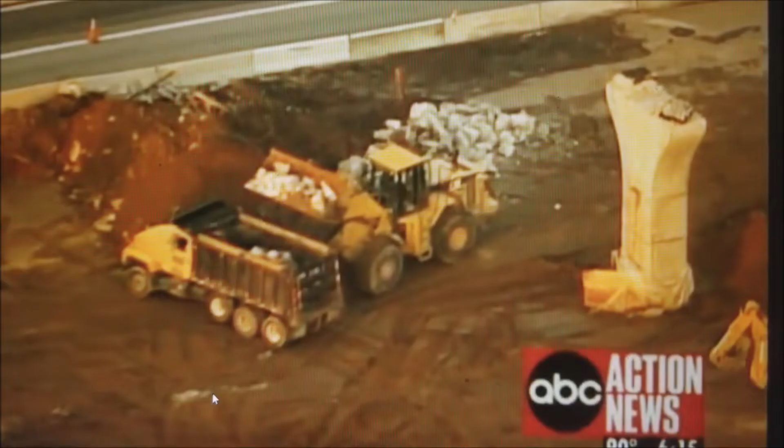In 2004, there was a pretty interesting project going on in Tampa. Cruising through Channelside Boulevard and dipping through the port of Tampa and down through Ybor City on its way out

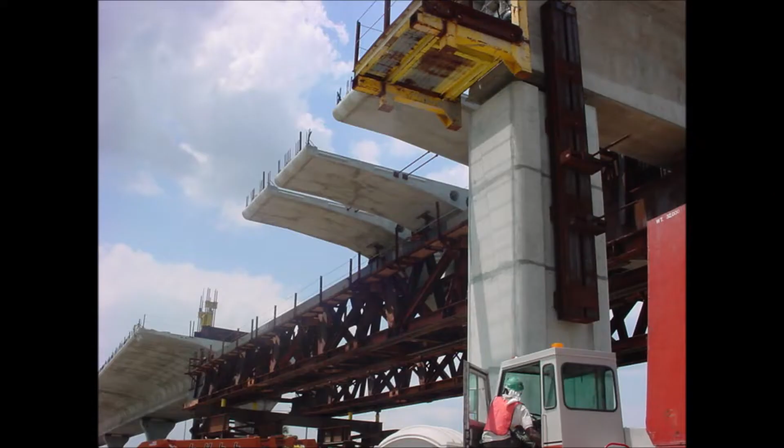to Brandon was a 9-mile reversible highway called the Lee Roy Selmon Crosstown Expressway. It started out as a lesson in the efficiency of the underslung gantry system. And there's not many things in construction as fun as standing on the giant column setting big old straddle bents.

But somewhere along the line it turned into a lesson in just how high the chain of command will go, and just how many dominoes will fall when people start cutting corners.

Governor Jeb Bush is weighing in on problems with the Crosstown. Anybody want to know how to get reporters to start asking the governor of the state and brother of the sitting president questions about the personnel on your job site?

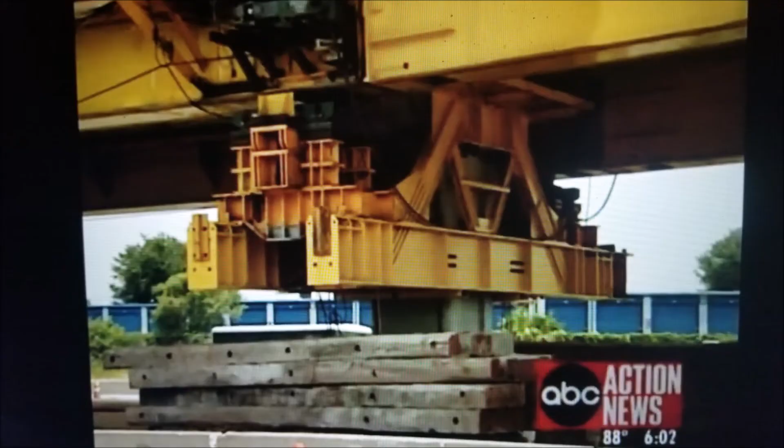If a road has got that much overrun and those kind of flaws, then it calls into question the management. And let's just say that there's an act of God on the job site. Better hope it's the good kind, like getting sunshine every single pour day.

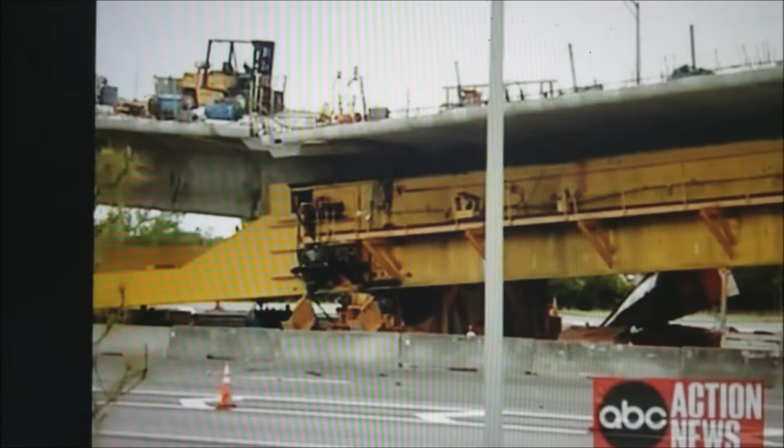Blame the collapse of Pier 97 on a mysterious sinkhole. An act of God, they claimed, impossible to predict. I don't know what to call it. I don't like to call it an act of God.

Well, I can tell you that if anything like that happened with our forces and we were aware of it, we would dismiss employees like that, because that's certainly, if that's the case, that's not something we would tolerate.

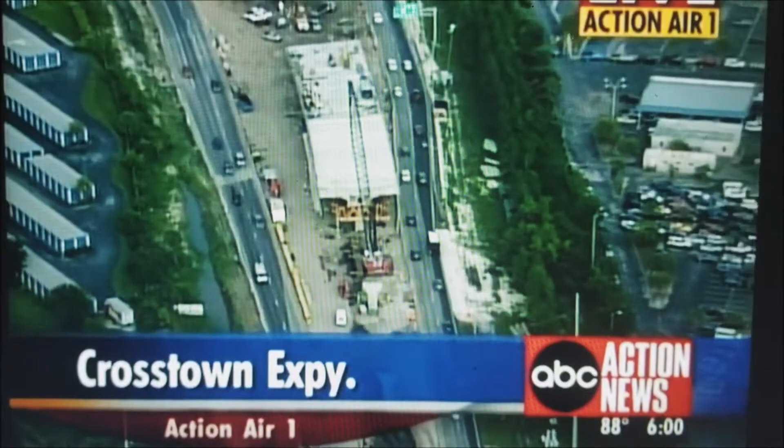How about this one? The whistleblower protection blur, where everybody knows exactly who that guy is. Was sinking. You blew the whistle on it. Yeah, I guess they just wanted to keep it hush-hush for as long as they can.

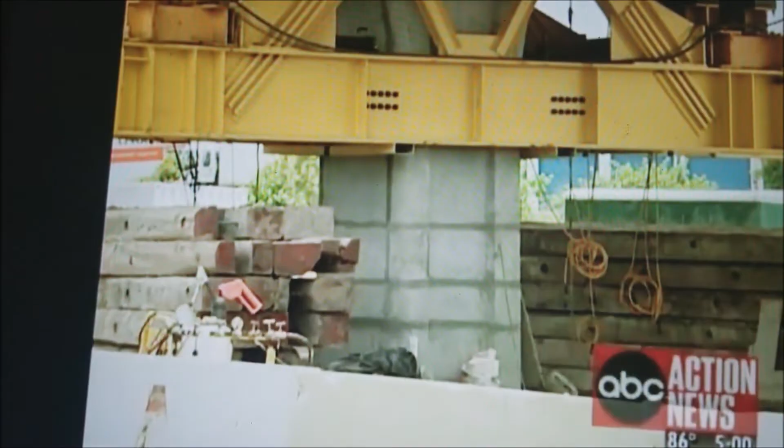He learned his lesson the first time when Pier 97 sank last April. He was right there when it collapsed. Pieces of concrete fall into the highway.

The entire Crosstown project was immediately ground to a halt. We have stopped work. We have stopped work because of the special things that have happened at Pier 97. We're erring on the side of caution, and we're stopping.

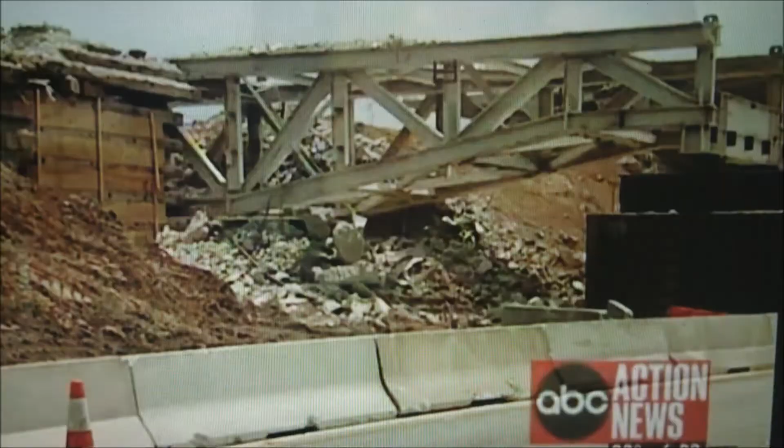It is kind of interesting, though, watching people from outside of the industry explain construction physics. Like a reporter telling an inspector why a column cage with a slight twist in it would explain why the earth would open up and swallow the column into the ground.

The steel cage inside was damaged and twisted up. There's absolutely nothing that would suggest that anything you're asking about had anything to do with this pier falling down. This is a wild goose chase, Mike.

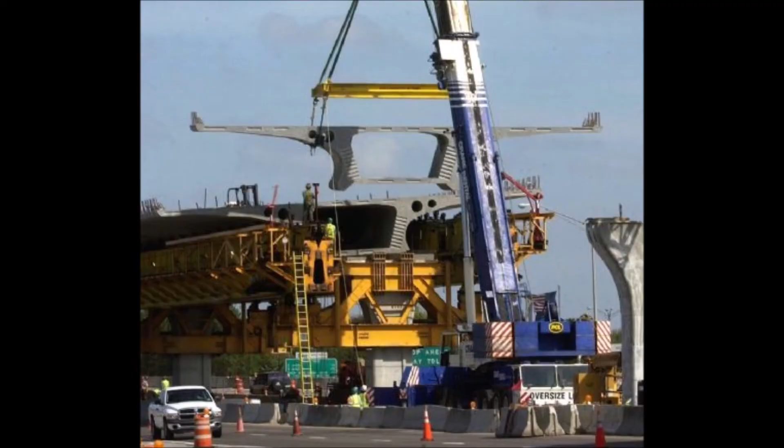But once the news helicopters get involved and the heads of powerful companies start getting squeezed and governors start pushing back, that's when the dominoes start to fall.

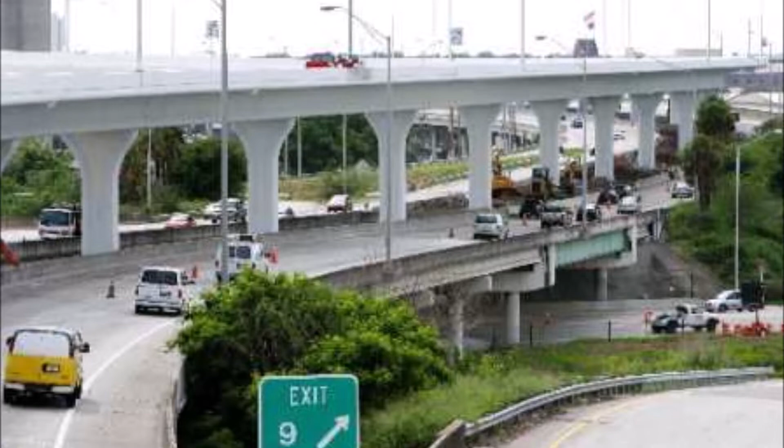As the executive director of the Expressway Authority suddenly saw not only him but his entire organization on the chopping block of the state DOT as it threatened to eliminate the entire Expressway Authority.

Crystal clear, he's losing control. Whatever Pat McHugh does from here on out must first be approved by DOT's structural engineer, William Nickus.

As the focus is now on testing the soil around every pier on the project, so it looks like he may be pointing fingers a little bit at the geotechs. And Expressway officials knew about it.

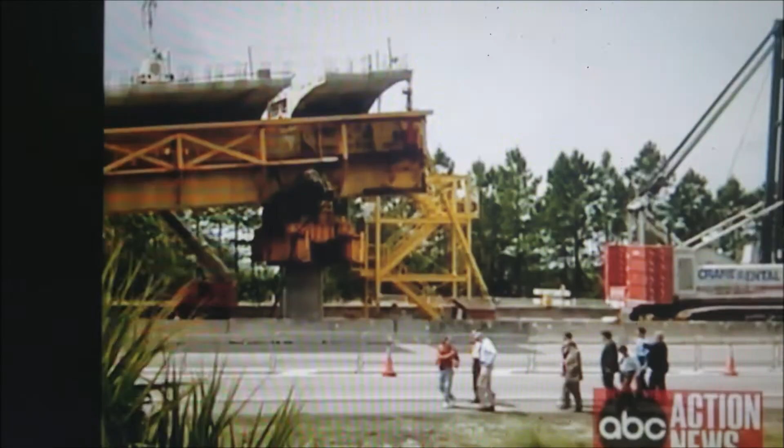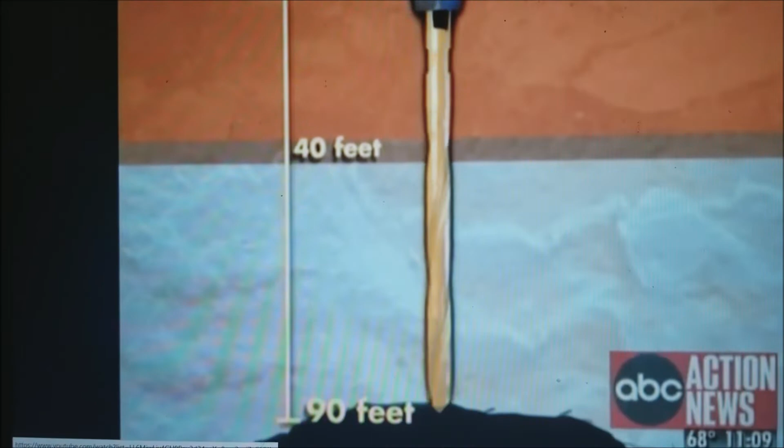Our review of hundreds of engineering documents and field notes tell the real story. Last year, engineers took a soil sample drilling 90 feet underground. They discovered signs of a sinkhole under the area that would support Pier 98, one pier away from the collapse.

If it shows soft material there, it would be a concern. Bill McDaniel is the construction manager on the Crosstown project. Records show his engineers reported signs of a sinkhole in their field notes and added reinforcements to Pier 98.

But they did nothing to shore up the adjacent piers, including the one that collapsed. We don't try to make a bridge that's going to collapse. That just wouldn't make sense.

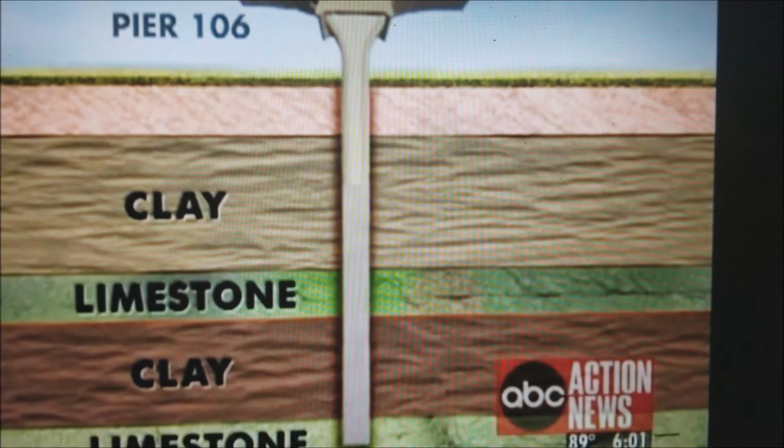Expressway officials say they did everything possible to keep the Crosstown safe. But this report, written in 2001, raises serious questions. Below Pier 106 was full of soft sandy clay. Workers had to dig 147 feet before they hit solid rock. Now look at Pier 98. Experts found layers of clay and soft rock. They finally found solid limestone at 87 feet.

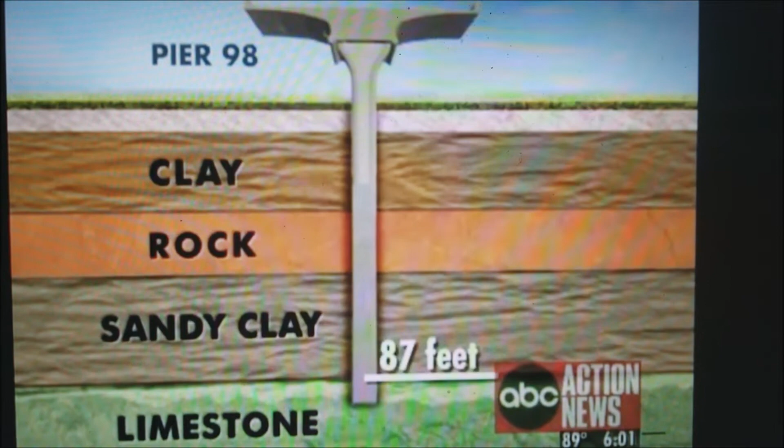Soil expert Jeff Eller says the soft zone around these piers could be a problem. Now they have a different story. At this point, we're not saying a sinkhole, but we do have an extreme geological condition. You said sinkhole before, though. What we first saw and the way it acted initially, and again, we said this many times before, we're speculating because we aren't geotechs.

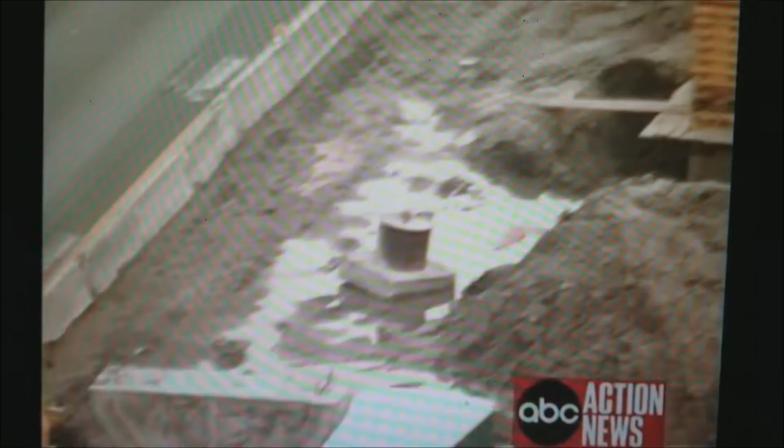Ordered any additional testing? Crews went ahead constructing Pier 97 with no additional reinforcements. Soil engineers failed to sign off on many reports as required. How do I find out if a structural engineer really did sign off on that? There should be paperwork to that effect. But we found no paperwork to show engineers had signed off on any key reports.

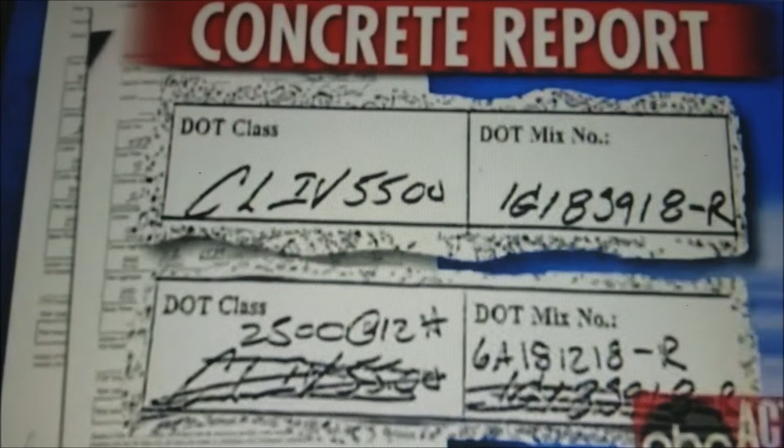And as you know, the bridge did come down. This report shows what type of concrete was used to build the bridge over I-75. Here's the original, and here's what the Expressway Authority gave us. Someone has altered the information. We presented our findings to the new leadership at the Expressway Authority, and they've promised to do a full investigation.

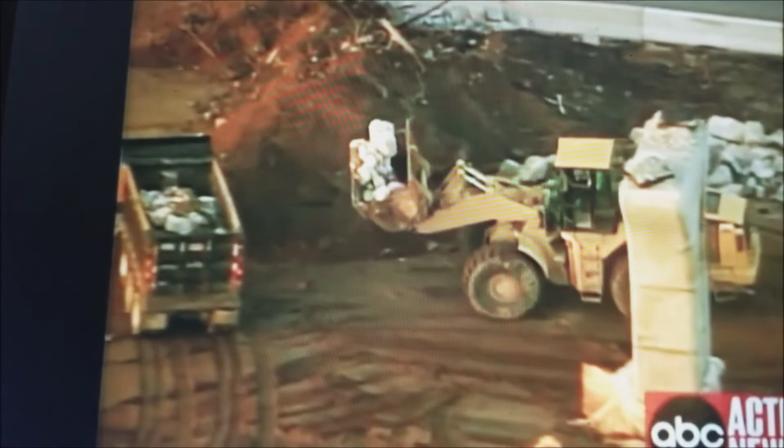The Expressway Authority has always blamed engineering firm URS for designing faulty foundations. We wanted to hear their side of the story. Senior Vice President Tom Logan came up from Boca Raton, and he promised to speak with us, so we could let the public know their position.

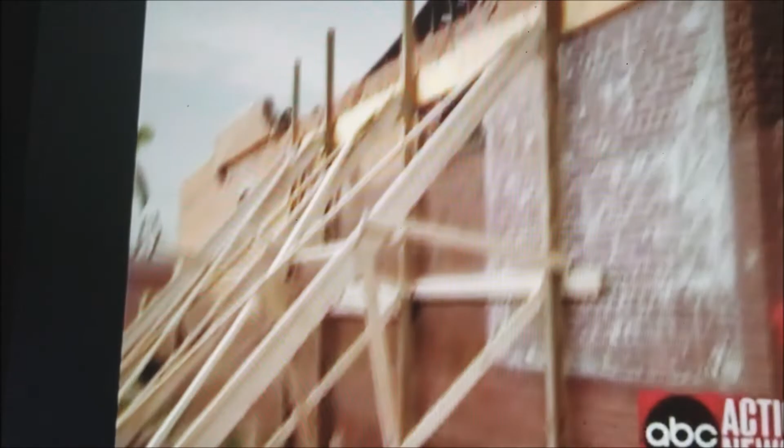No idea that the DOT had funded this project in excess of $150 million. Bracken is the man state officials called to assess structural damage after a hurricane hits. He hopes taxpayers won't be hit with bailing out the Crosstown. After all, it's one disaster that could have been prevented. It's disappointing to me, as someone who's done work recently in the Punta Gorda area and more recently in the Pensacola area, to think what those two areas could do with $150 million.

Expressway Authority will have to sell bonds to pay back some of their DOT loans, but financial consultants say all of the construction problems with the Crosstown could result in a lower bond rating, and selling those bonds to investors won't be easy. Any future bond sale can be used completely for repaying DOT and also for bridge repair.

Expressway officials laid out a financial plan to dig themselves out of this mess, but if the Department of Transportation secretary doesn't buy it, he could dissolve the Expressway Authority altogether and turn the Crosstown into a Florida turnpike. There's a lot of material in that report that we need to address, both the technical and the financial, and it'll be submitted to him tomorrow.

This whole Crosstown mess is costing big bucks. You have the overhead costs, which are roughly $11,000 per day. The cost to fix those foundations has risen from $70 million to $78 million, so a lot more than originally anticipated.

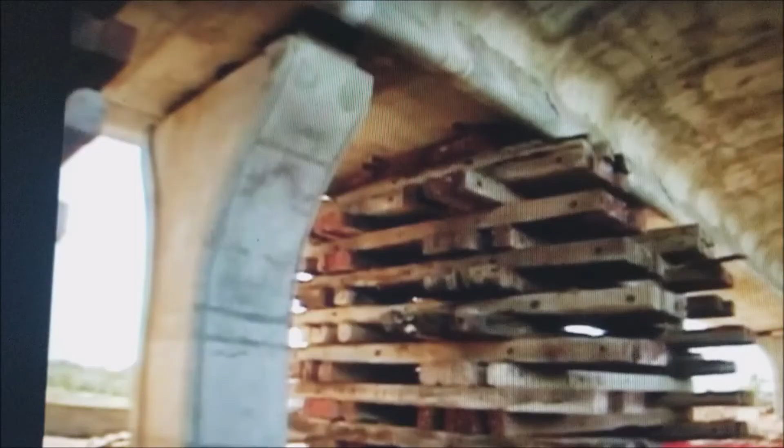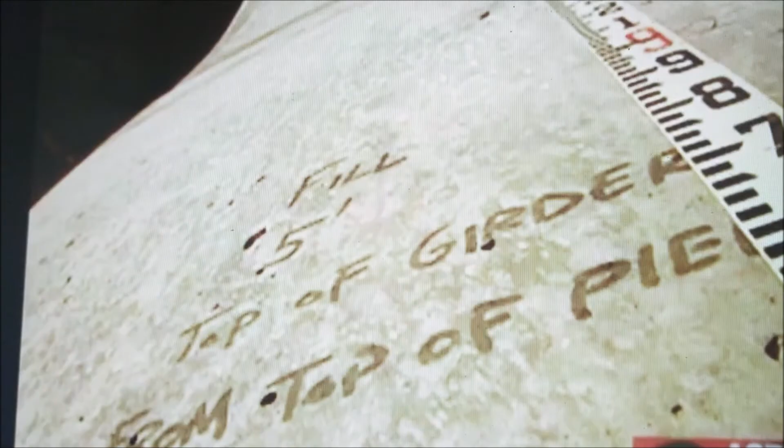So there's one thing to take away from this episode: don't cut corners. There's a bunch of things in construction that turn into folklore. A bunch of wise guys on the job site never believe it. And you know what? This story is one of them — the day the ground opened up and swallowed the whole job site. But the truth is, this game's real. You can start putting people's lives in danger real quick.